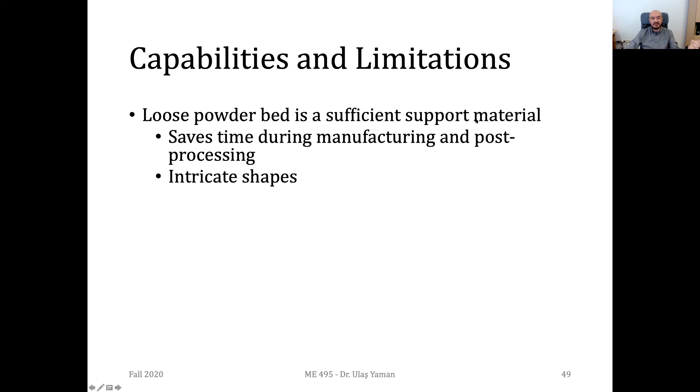Another advantage, especially with polymers, is that you don't need to do post-processing. You don't need to do curing. You can just do a little cleaning operation and you'll be done. Another advantage with this powder bed feature is you can have intricate shapes produced in a shorter time in an easier way. But since we are using powders, they're not as accurate as SLA or photopolymerization processes. We will have a kind of grainy surface on these powder bed fused parts.

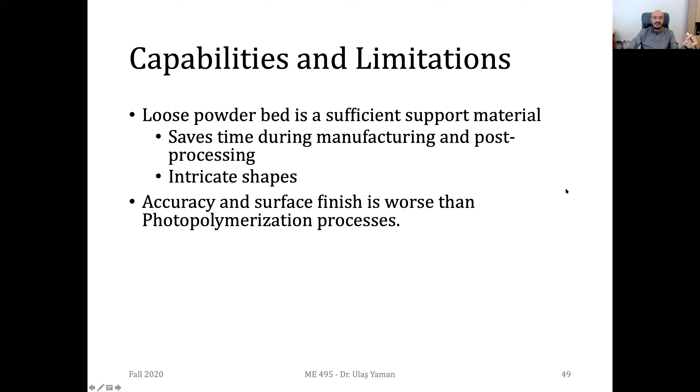Another issue is that once your powders have low thermal conductivity, you'll have high accuracy. Can anyone tell me why we have such a property? Why do we have high accuracy with low thermal conductive powders?

Any volunteer? If it has high thermal conductivity, the powder next to the position we want will also melt and then fuse together. Yes, you're right, this is actually the main thing.

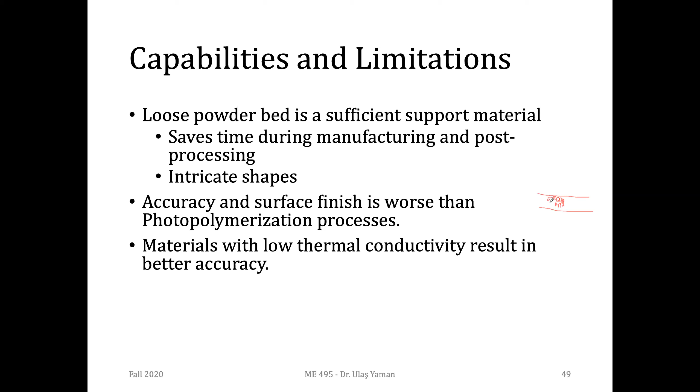Assume this is layered and you have many powders around. If the powder has high thermal conductivity, then once the laser is reflected on it, it will dissipate its heat to the neighboring powders. If that's the case, they will be remelted and fill all the gaps, but the accuracy will be lower.

But if you have low thermal conductivity, then the powder will only transfer heat to the neighbors right around it, not the ones farther away. In that case, with low thermal conductivity powders, the geometrical and dimensional accuracy will be better than with high thermal conductivity powders.

Another problem with powder bed fusion is that the part construction time is longer compared to FDM, FFF, or SLA, since you have to fill the bed completely with powders. Depending on the height of the object, even if you're just printing a pencil, you need to fill the complete bed with powders. But if you do feasible programming and planning, you may fit many parts on top of each other and eliminate this disadvantage.

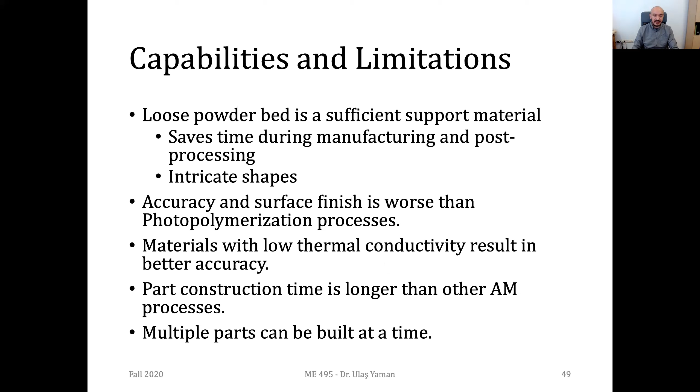So this is actually the last point, kind of an advantage: in the same bed you can print a pencil and another box at the same time. Even with different shapes and different orientations, you can print many small parts on top of each other at the same time. With the help of this, you can decrease the overall fabrication time, making it suitable for medium-sized, medium batch production.

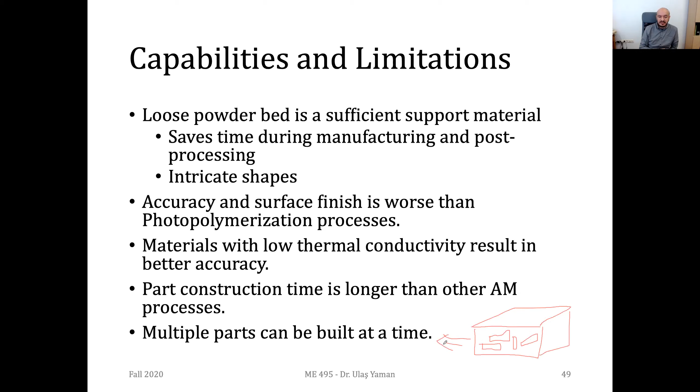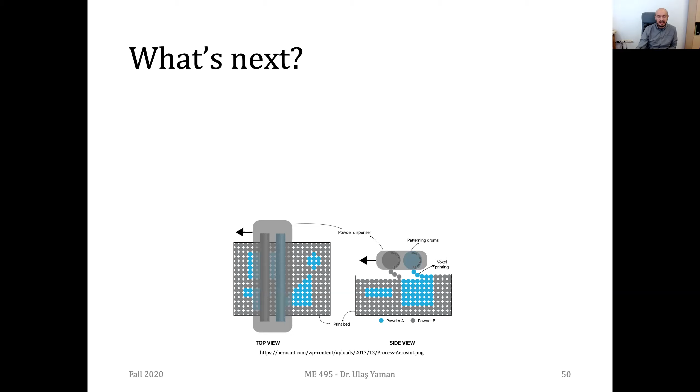So these are actually the main limitations and advantages of powder bed fusion process. But what is next for these type of processes? We have a new company working on a different powder handling system.

They use two different types of powders at the same time. That's why they call their process multi-powder printing. In this illustration, you can see blue powders and gray powders. They don't give details of their powder dispenser in detail, but we can assume they have two kinds of rollers. This time, these rollers are not going exactly on the plane.

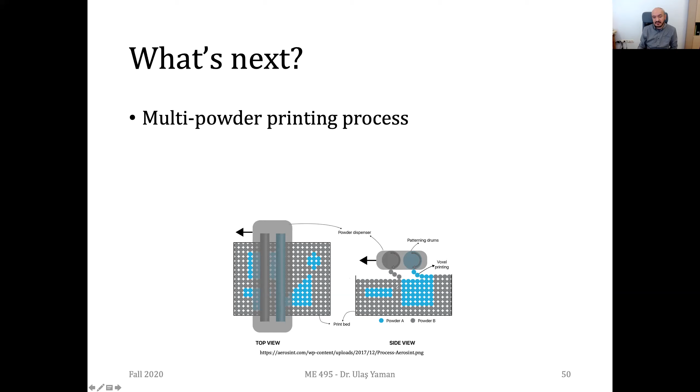They are a bit above the plane, and they are depositing these powders in a very controlled manner. They know how much they are depositing, and with this feature, they can deposit specific powders to a specific region, and the remaining region may be filled with gray powders.

So it's a very nice property, and the company is called Aerosint. They started doing this job around 2015. Right now they have a much better system. I want to share their website now.

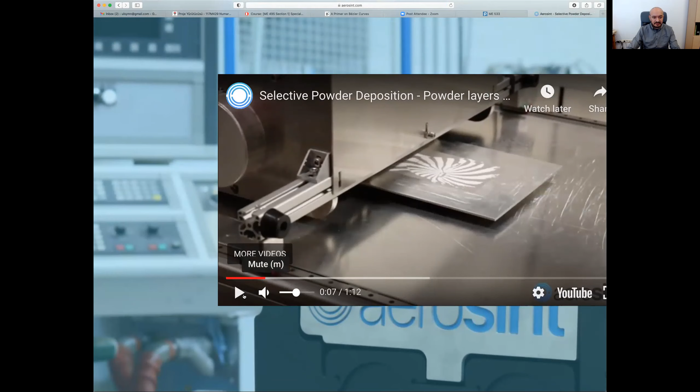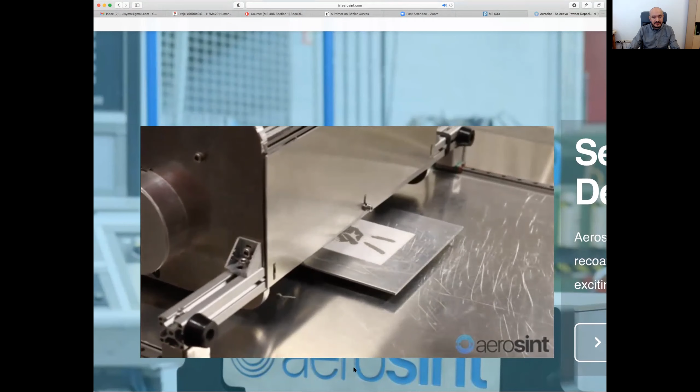Here's another one. They use titanium and aluminum ceramics at the same time. Here's another one, copper and stainless steel.

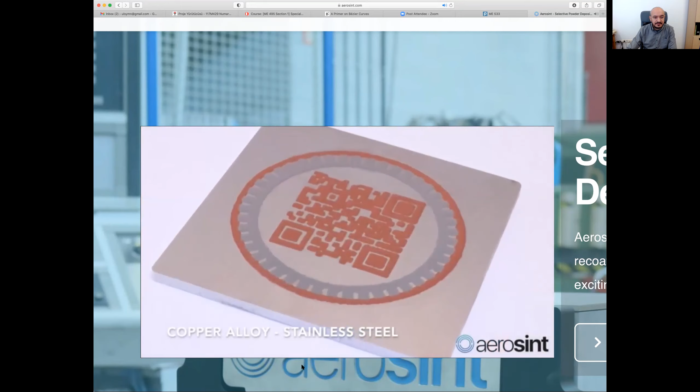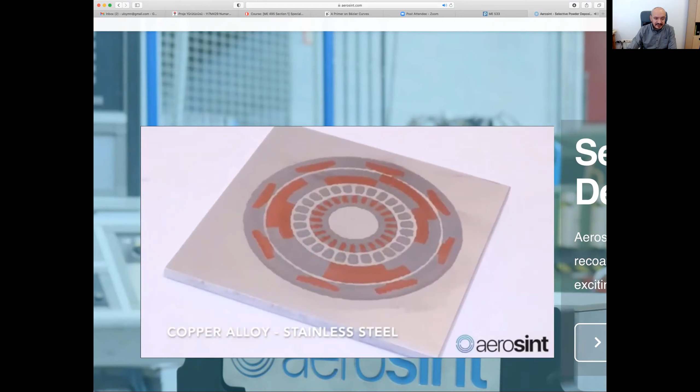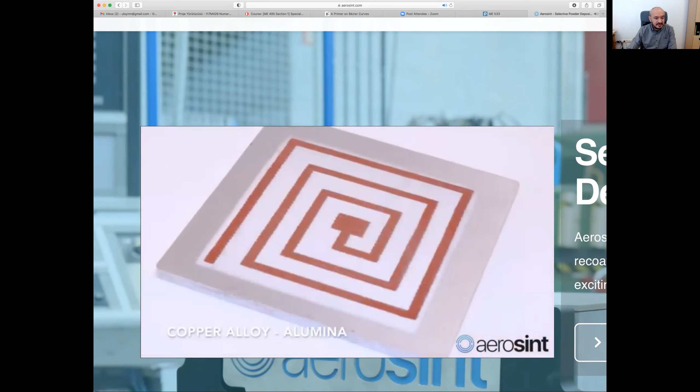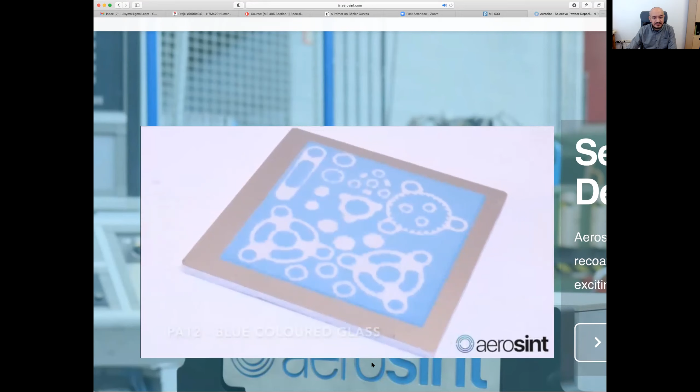And they have even more complicated shapes. So this is the feature of powder bed fusion systems. They even joined copper with ceramics, and here they have some kind of colored glass. They can also have gradient transitions between two different materials. We don't have a pure transformation, but it's done in a gradient manner.

So their website is quite informative. You can have a look at different applications. Here you see, for instance, there are some cube shapes. Some part of it is copper, some part is steel, I guess.

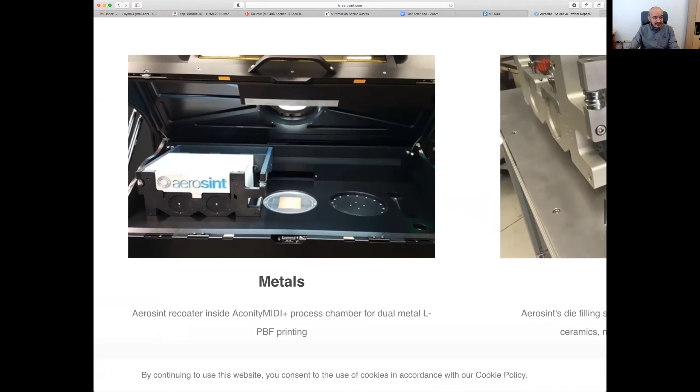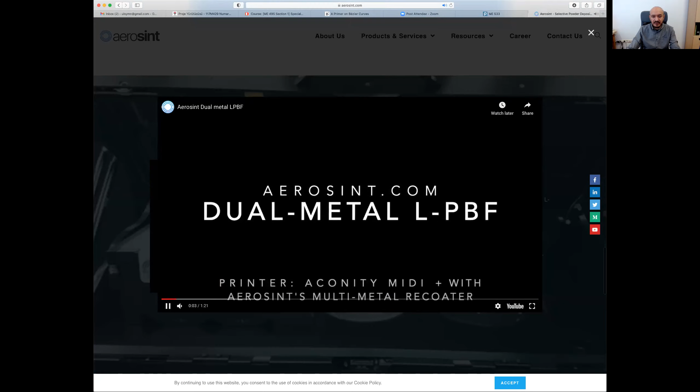This shows the details of their powder handling system, but not in a detailed way. There's another small video about it: dual metal laser powder bed fusion process. So they are coating the bed with copper and steel, I guess. And now they will do melting—dual metal laser melting.

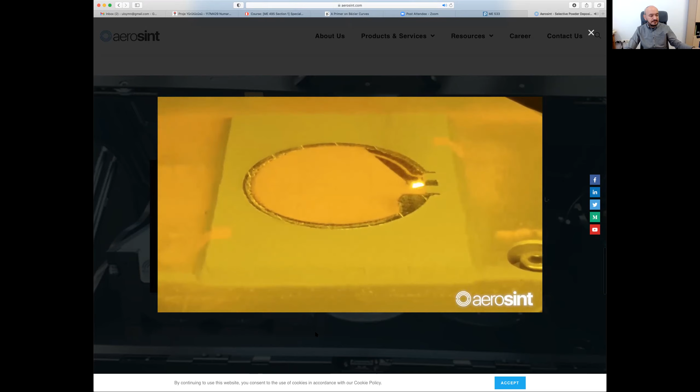I want to show you some use cases, or there was a kind of explanation. I think this was the thing I wanted to show. Another important issue about their system is that they do not sell the complete machine. They only sell their powder handling system, and they can make it usable on any kind of laser powder bed fusion system.

Copper steel printing. Some examples, some nice figures, but this wasn't the thing I wanted to show. Yes, here it is. They are comparing their system with the doctor blade. This is doctor blade, and this is the counter-rotating roller.

As you see in the conventional ones, we have some shear forces on the plane, but right now they're not touching the build table or the powder bed. That's why we don't have any shear forces. They can use multiple materials.

Their advantages are listed here, but fundamentally, these are the basic things: they can use different materials at the same time, or the same material but different sizes of powders may be used at the same time.

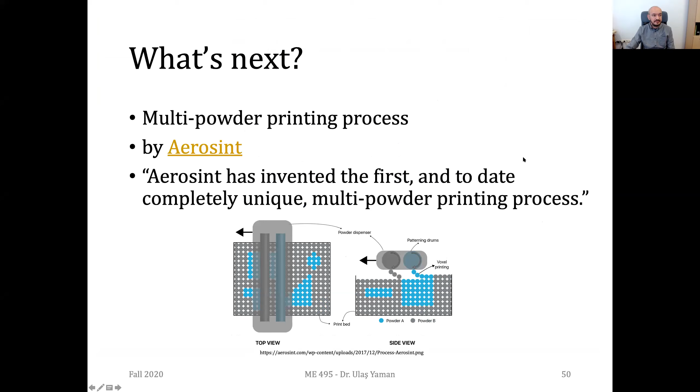Okay, so let's conclude this chapter. As you know, powder bed fusion processes are one of the first additive manufacturing processes. It's quite popular, mostly used for prototyping, and these days we start to use it for some end cases. It's sometimes quite competitive, especially for low to medium volume production, since with a larger building volume you can produce many small parts in a short amount of time. These days we mainly have companies focusing on metal-based systems, especially for the aerospace industry and biomedical industries.